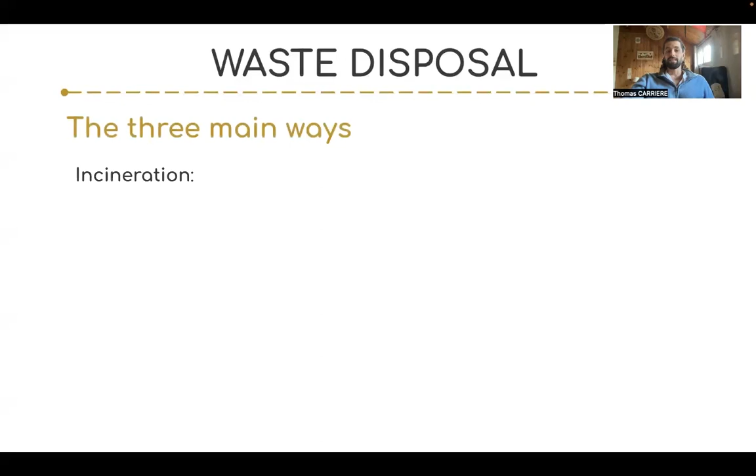Plastic recycling, technologies, and solutions. So first of all, let's talk about the different main ways for plastic waste disposal. There's three main categories and many other small projects, but let's talk about the three main ones. First of all, you have incineration, which means that we're going to burn the plastic waste to get energy. It's quite developed in Europe, in the developed countries, and also in the third world. So burning the waste to get some energy, even though it pollutes, is still better than putting it in nature and giving it hundreds of years to degrade naturally.

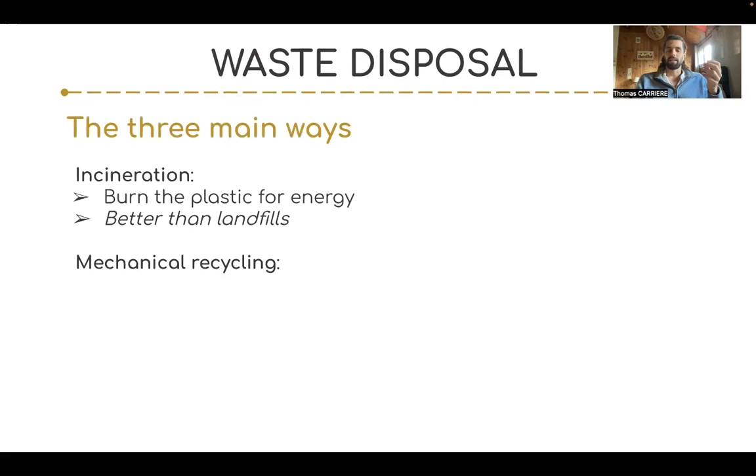So it's not great. It's not really a recycling technique, but it's a very well implemented technology all around the world. So at least it doesn't rot in nature. At least we get something out of it, some energy, some electricity. Better than incineration, we have what is called mechanical recycling. So this is about reducing the plastic waste into small pieces, what we call plastic pellets. You might have seen that in some documentaries or on the news. When they show that they are doing plastic recycling, you saw all these little beads that also sometimes end up in nature. So that's much better than burning it because it doesn't cause all this pollution. We can reuse it for something else.

Now we need to understand that when we're doing mechanical recycling, you need to put new plastic with these plastic pellets in order to use it again. Because when you're shredding this plastic in little pieces, you still have the chemicals and the paints and the coloring and the stickers that were on it and so on. So it's not good quality plastic. So to make bricks, for example, that we're going to use in construction for roads and buildings, you take these plastic pellets, which come from recycling, and then you put new plastic also. Bit better than burning. Now, today, in our day and age, we can do better. And that's what we're going to talk about today.

It's called advanced recycling. And the goal is to decompose chemically the plastic into its constituents. And you know, plastic comes from petrol. It comes from crude oil. It's actually possible, and we're going to discover that today, how you can extract from the plastic the original material, as close as possible, and then you can make new plastic with it. That's much better because you can have a high quality of plastic. So you have several technologies for that. Pyrolysis is the main one we're going to discuss today. You have catalysis, solvolysis, you have enzymes, you have work with bacteria. But here we're focused on solutions that have a chance of making a difference on the larger scale in the world.

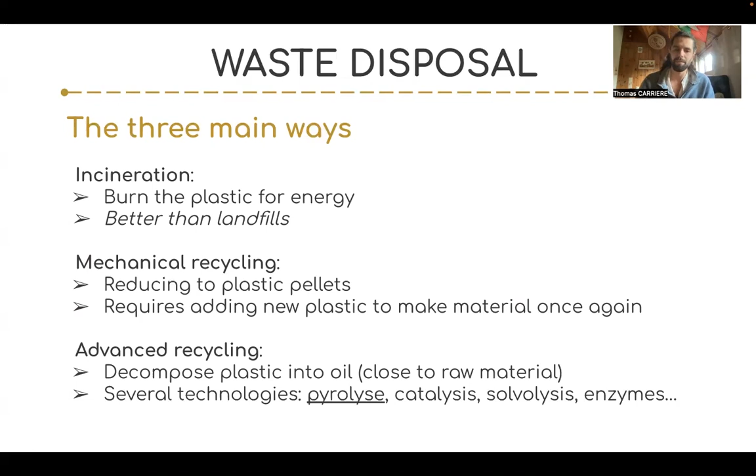Let's look at what's happening in France, for example, because I'm from France and it's a developed country. So we are told when you put the plastic into this yellow bin, it's going to be recycled, no problem. That's what we are led to believe. But the truth is, in France today, 25% of the plastic waste is going to be burned, so incineration, 15% only is actually recycled, mostly with mechanical recycling. And 60%, which is most of the trash, actually ends up in landfills. And that's shocking, because we were told that when we put it into this plastic bin, it's going to be recycled. But it's not true.

Like we saw last time, until 2016, we were actually shipping all this plastic waste to Asia. And today we cannot ship it to Asia anymore. So we put it in landfills and we try to develop the recycling. It's probably a similar situation in America and in the other modern countries. We are told we recycle, but truly we recycle less than 20%.

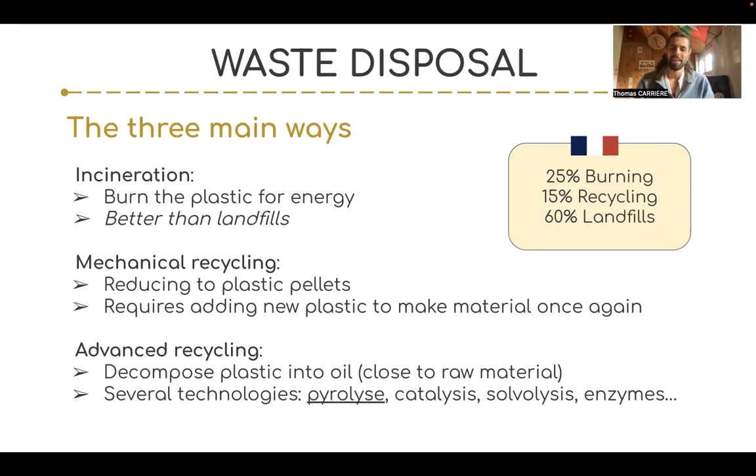Great. So today we talk about advanced recycling. Why is it really a big opportunity? Let's look at what McKinsey is saying. McKinsey is a global strategy and consulting firm where actually many of my friends from school have been working. And they made this study in 2023. So this is from this year.

McKinsey, they advise the CEOs of all the top companies, and their business is enormous. So they're really the reference, with the Boston Consulting Group, for the global strategy and what's happening on the market. And McKinsey, they're saying that actually the advanced recycling opportunity is going to grow to require more than $40 billion by 2030 and $90 billion by 2040.

So you can see here on the little analysis. In black, it's the plastic that's coming from petrol. In light blue is the advanced recycling, and in navy blue is the mechanical recycling. So you can see the mechanical recycling is projected to become bigger and bigger, from 7% to almost 20%. And the advanced recycling, which is the one that CORSAIR is doing, is almost inexistent in 2020, and is going to grow to 6 to 10% of the market.

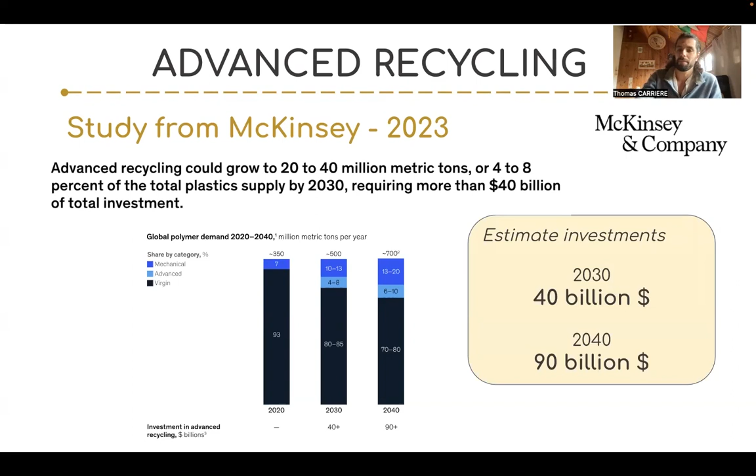And then there is a study from Google from last year. And Google is showing this in the report. I can send you the link. It's a very long report on everything that's happening around plastic. In 2019, the size of the market, of the current capacity for this recycling, is 1 square. And you can see for mechanical recycling, which is the one that just cuts into little pieces and then you need new plastic, is going to multiply by 4 by 2030 and then by 6 by 2040. A market that multiplies by 6 is already great.

Now look at the chemical recycling. They are predicting that by 2040, this market, due to the capacity that is required, the market needs, is going to multiply by 135 times. Do you see that? So Google and McKinsey analyze and tell us there's an enormous market for chemical recycling, meaning re-decomposing the plastic into an oil that then we can make new plastic with.

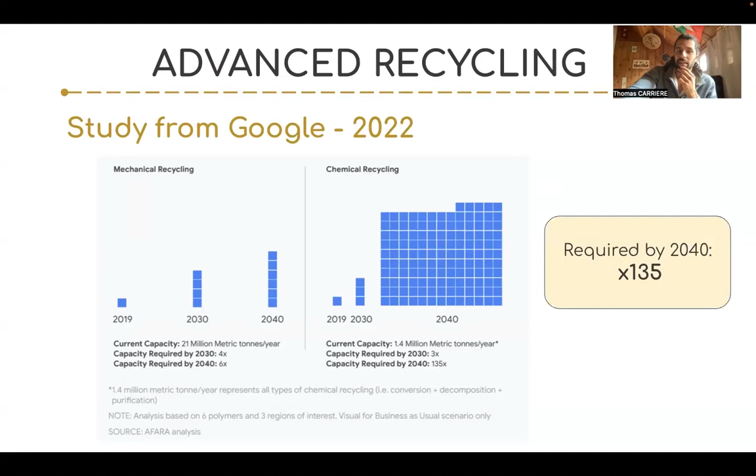So that's what we're going to talk about today, because CORSAIR started in 2020 and is going to ride this huge wave. And we want to ride this wave with them. So that's amazing, and that's very big. Let's talk now more pragmatic. What is this advanced recycling called pyrolysis?

The simplified process, I took it from a video on YouTube, it's this. You heat not too high, around 400 degrees. You put the plastic into a container. You take out the oxygen and you just heat it. You play with the pressure and the temperature, and you have two main products. The first one is gas that comes out of the plastic. And the second one is this pyrolysis oil, resembling gasoline. And that's what we're looking for. We're going to see real pictures after.

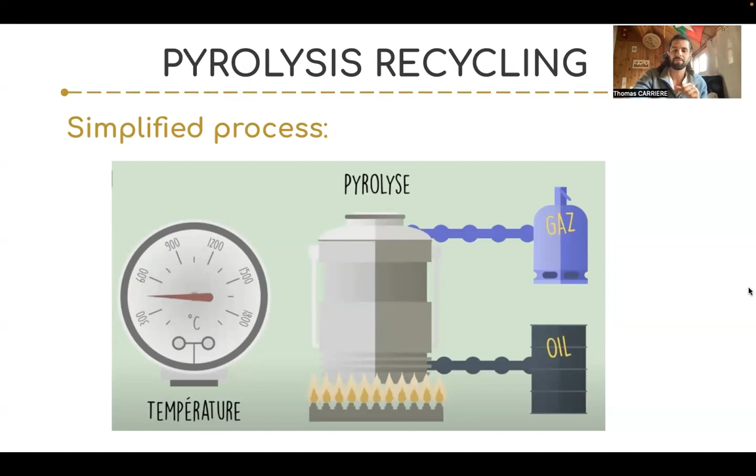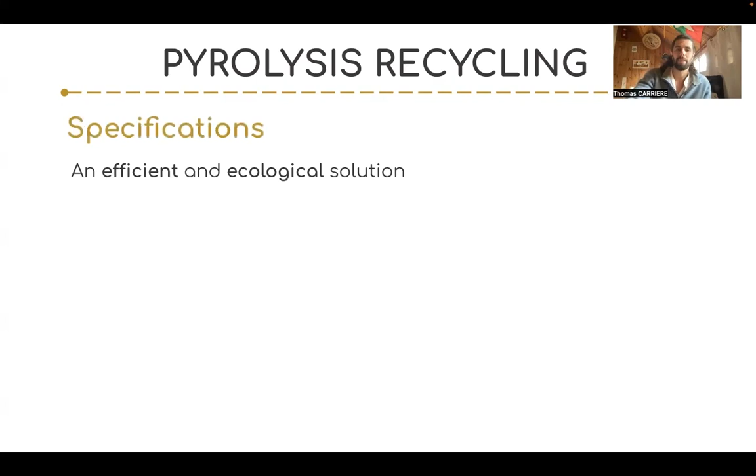So basically, it's a cooking pot in which we put the plastic, we take out the oxygen, we heat it, but we don't burn, and it's going to re-decompose, it's going to melt into gas and oil. Makes sense because it comes from petrol. So we're going to dive a bit deeper. This particular technology, the pyrolysis, is very efficient and very ecological. That's why we're so interested in it. So let's talk about the efficiency so we really have an idea.

Today, the technology on the market can convert all the plastic waste into pyrolysis oil up to 75%. And CORSAIR developed the knowledge by working with all the industrial and university experts up to 90%, and they proved it. So it means that their capacity, when you take a big pile of plastic, is that they can transform that up to 90% into what we want, the pyrolysis oil. So that's very efficient. There is little loss there.

And the most important is that when you make new plastic with this oil, it's going to have the same quality as if you made it with new petrol. And this is major because with the mechanical recycling, when you cut in little pieces and then you put new plastic, it's bad quality. You cannot make containers for food or for the pharmaceutical industry because there are all these chemicals and these paints and this waste inside.

Here is much more interesting because it's literally saying that you can take the plastic waste and make new plastic, same quality as if you did it with petrol. So of course we should use it because remember what we saw last time, there's 10 billion tons of plastic laying around in nature. And we could take from this plastic and make the same quality, also for the pharmaceutical industry and for the food industry. So it's very efficient.

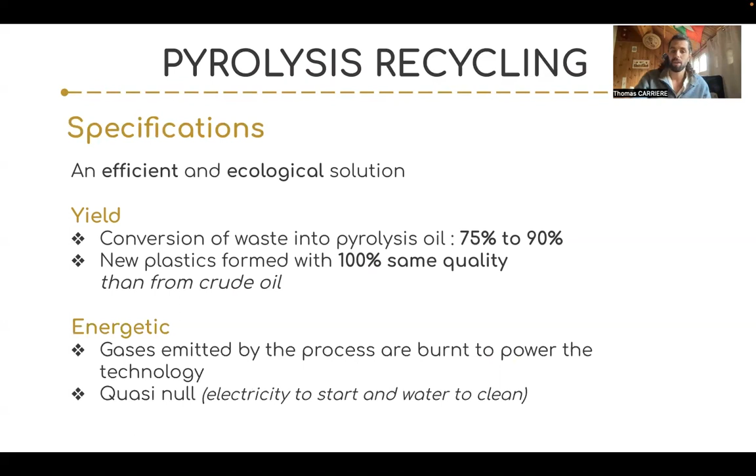Now let's talk about the energy balance. What does it require? What's the most interesting with this technology is that the gas that is emitted by the process is going to be then burned to heat the machine. So it's self-sustaining. And that's very powerful because the actual recycling plant doesn't require so much energy. It's very ecological. All you need is electricity to push the plastic into the machine with a hydraulic press.

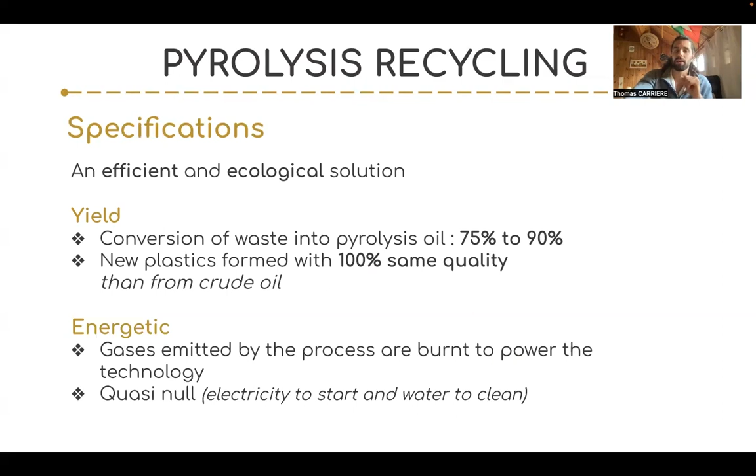So here you need to push with the electricity to make the engine run. And then you need water, a water source to clean the gas and make sure the whole process doesn't pollute. So that's why it's very efficient and very ecological at the same time. And that's why we're so excited about it. All right. So you can make new plastic, same quality as if you took new petrol, and it almost doesn't require any energy. Super powerful.

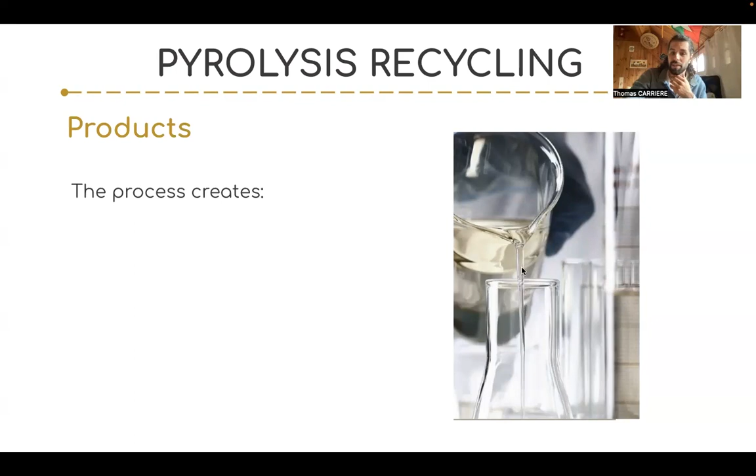Now let's look at what's coming out of this process. First of all, you're going to have the actual pyrolysis oil. We're going to call it plastic oil. That's what we're looking for. It looks like this when it's very high quality. It's very transparent. This pyrolysis oil is what's going to be used to make new plastic later. Then you have gas. But these gases, we said, we're going to put them in a pipe and then burn them under the oven. So they are used in the process to make the machine run.

And finally, you have some black residue. It's actually charcoal. And it's coming from all the paints and the coloring and the chemicals that were inside the plastic. They're going to pile up at the end of the process. And it's like a very dark charcoal material. And the good news is that we can also do something with this black material. We actually sell it to companies that are coloring car tires.

And that's what I really love about this process, is that they found a way to valorize all the byproducts of the process. So you have a lot of plastic waste that no one wants, no one knows what to do with it, and it's really polluting the planet and our own bodies. And here you're going to extract everything from it. You're going to give jobs to people to clean it and operate the machine. You're going to get this pyrolysis oil to make new plastic and make the economy circular.

You're going to have gas that you clean and then you burn to make the machine run. And then even the black stuff that we could say is the pollution, actually you can use it as a colorant for car tires, for example. This gets me very excited because it's a very smart process to do something useful and also lucrative with all the plastic waste we're having.

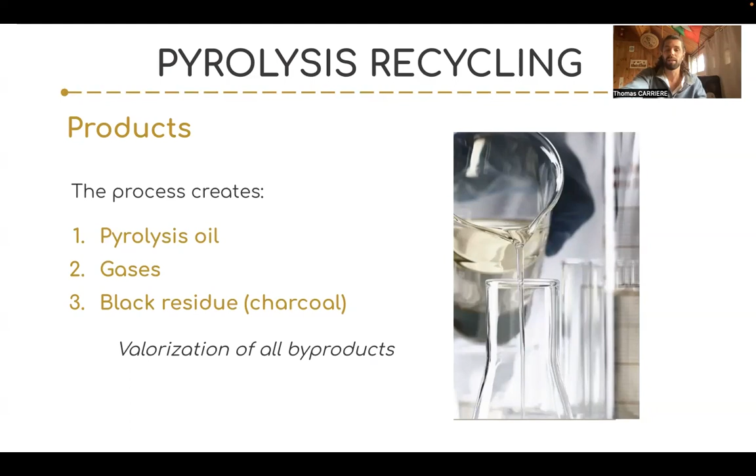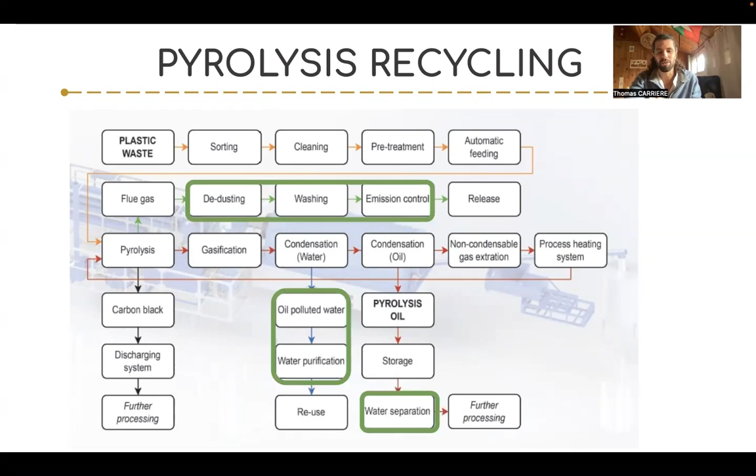It's going to make this carbon black material. And then you're going to clean everything that is coming out of the machine. You clean the gas, you clean the pyrolysis oil, and you make sure it doesn't pollute the environment. So everything you see here in green is modules that are here to clean everything around the process. I'm going to show you in images right after. But what's crazy is that there are as many machines to clean all the gas and the products as machines to actually recycle.

So there is this ISCC that is very important. It's the International Sustainability and Carbon Certification. It's the body that is checking everything regarding pollution, carbon credits, and now it's going to look at plastic. This institute has a certification that is quite hard to get. For example, in Thailand, there are only 2 companies that have it, including CORSAIR. So we could be like, okay, great, we're going to talk about a certification, but actually it's quite important. Why? I'm going to show you.

First of all, it guarantees very low pollution levels, because to have this certification, experts are coming to check your machine and to study the byproducts, and they check that you're not polluting the environment because you're not washing the gas or because you're letting it leak in the waters. So if you have the certification, it's that you could prove to these experts that you have a very clean process.

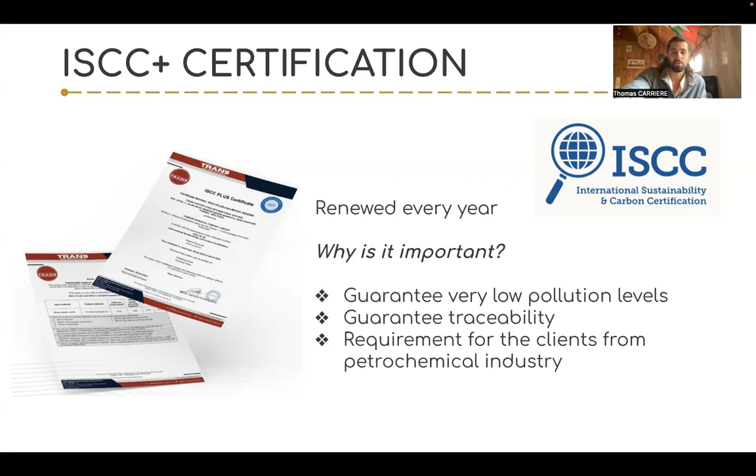Second, it guarantees the traceability. How you account for every kilo of plastic that is going in the machine, and how many liters of oil and gas and the charcoal. So the goal is to make sure that nothing goes missing and is buried somewhere in nature. And lastly, it's quite important, our clients, the ones that are buying this recycled material from the petrochemical industry, require to buy this plastic oil only from people who have this certification. Again, to make sure no one is creating the product and polluting further.

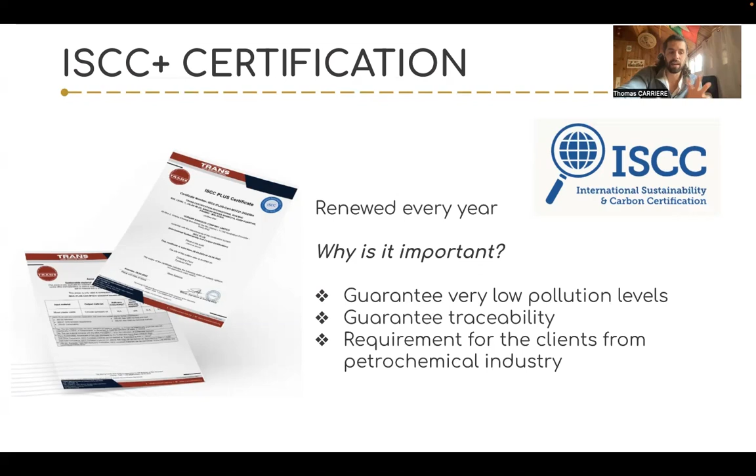So CORSAIR, this company, has this certification. It's hard to get, it's rare. And it's very important because it guarantees to our client and to the world that we have a really clean process. Okay, so just a word about the certification to guarantee that this whole chemical recycling plant is not polluting the environment further.

Now, what's very interesting about this particular product of CORSAIR is that it's extremely high quality on the market. You can find on YouTube some videos of people doing the process in their garage with big tanks, and they're burning the plastic to make oil and put it in their scooter. But actually, that's going to pollute a lot. It's hard to make a very high quality oil that is transparent, like you saw before. And CORSAIR is very proud of their product because they worked for 18 months in order to get it to that level.

The first time they had their plant, they made their machine, they brought it to the petrochemical industries, and they looked and they said, sorry, it's not good enough quality. We cannot make new plastic with this. And they had to work for 1.5 years with all the experts of Thailand, and probably also some international, to tune the machine and the process and make sure they have the highest quality of oil, which is amazing because then you can sell it for more money and make more clean plastic.

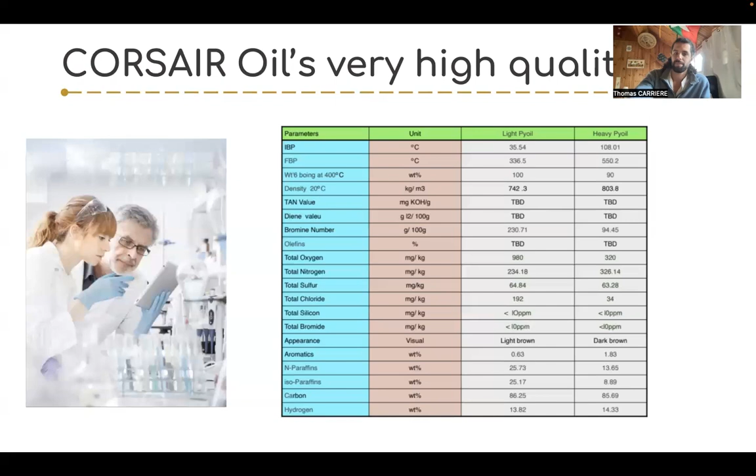Now let's talk about the carbon emission, because we can think, oh, these big plants, they're releasing so much carbon in the atmosphere because they're burning the gas and using electricity. This study that I'm going to give you access to as well discovered that when you compare the pyrolysis, what we're talking about, and the incineration, which is this other process where you burn the waste for energy, pyrolysis is actually emitting half as much CO2 as incineration.

So this particular technology that CORSAIR is bringing to the market is saving carbon emissions compared to what is already used everywhere around Europe and America, these burning plants. So on top of being very good for the quality of the plastic, it's also better for the emissions in the atmosphere.

So really, the more you dig in this pyrolysis world, the more your mind is blown. Because how come we didn't do this before? And I remind you why. It's because it was not mandatory. It was never mandatory to do the recycling, so big companies just continued to take new petrol and make new plastic and not care where it's going to go. Thankfully, this is about to change.

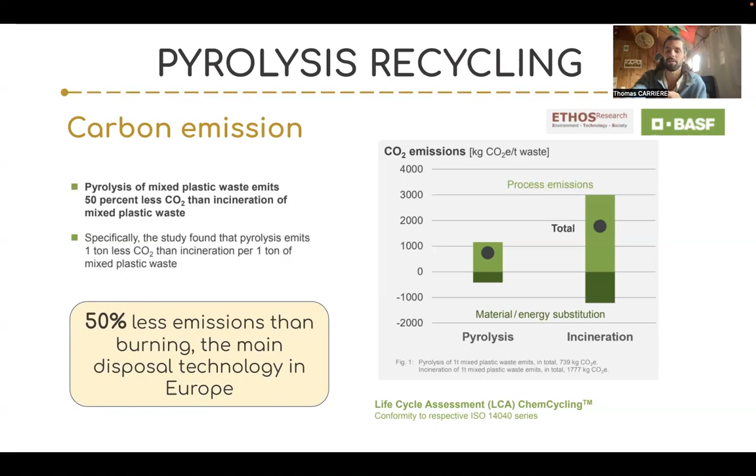So today we really looked at some specific reasons why pyrolysis is the future around making the plastic industry a circular economy, like paper, like glass, and like metal. So that's it for the hard contents. Now let's look at some images.

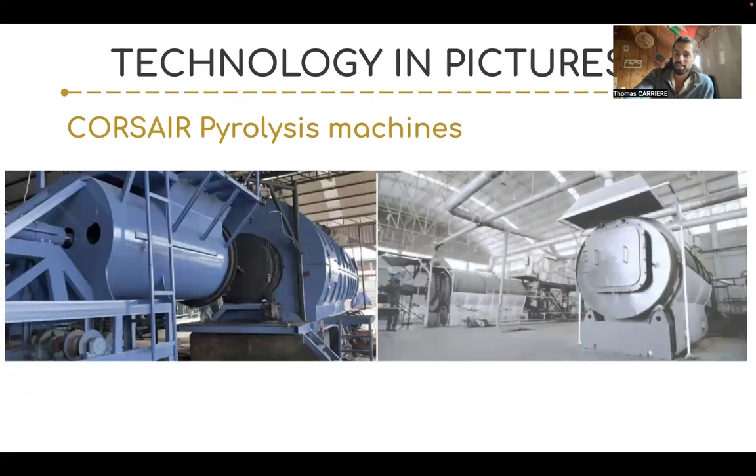These are the machines that CORSAIR has and that I visited myself in Thailand, in the center in Bangkok. So you have some blue machines, you have some gray machines, you have newer models that are green, but just so you know, they're coming from China and from Korea. They're the manufacturers of these machines. Then, of course, you need to install it and to operate it.

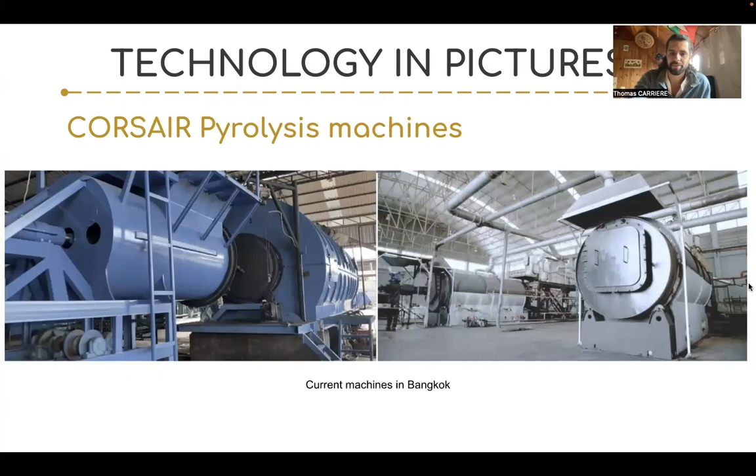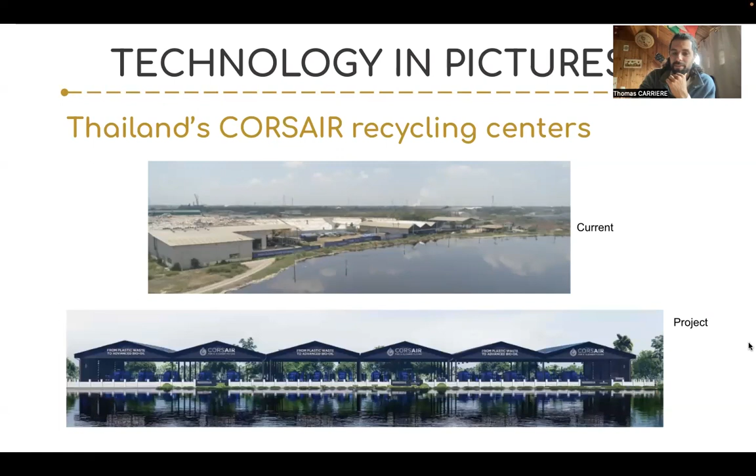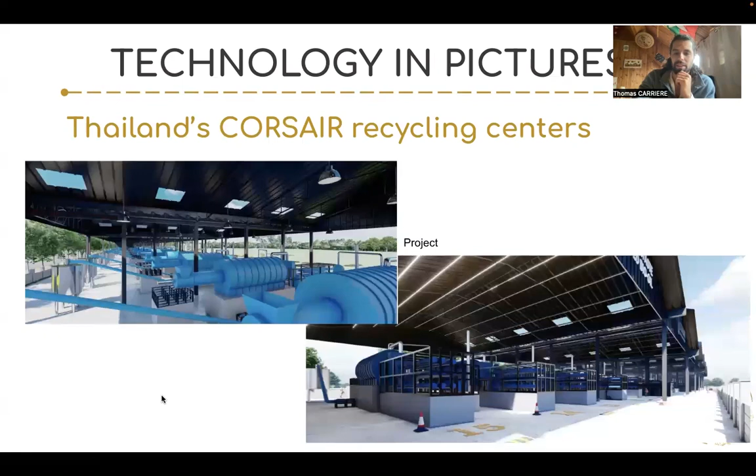And the project that they're having is to make it even nicer, but most importantly, to put many more machines. So if we look at all the pictures of this project, it's going to look like that. A lot of these machines, perfectly aligned and piled up so that it's efficient to run. So in a few years, when we go visit their centers, we get to compare the pictures with this plan.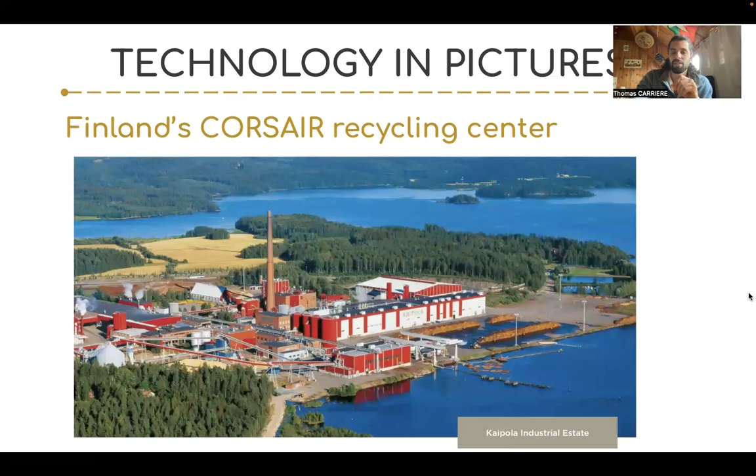And I told you before, and if you don't remember now, you have the information again. They opened in Finland, in a wonderful place in the middle of a lake. It used to be a paper factory that relocated to the south of America. They took over 6 hectares, this entire L-shaped building there. And they started to move in and install the first machine since this summer. So today, they have been installing the first reactor.

So here you see another color. And I just wanted to show you this. This set of machines is the same size as the whole reactor. And this entire set of machines here is just to clean the gas and to ensure that the process is clean and doesn't pollute the water or the air. Remember, I was telling you before, there's actually almost more machines to clean around the reactor than the reactor itself. So that you can see in pictures.

And like I said in the introduction, they are starting the tests at the moment when I'm recording this training.

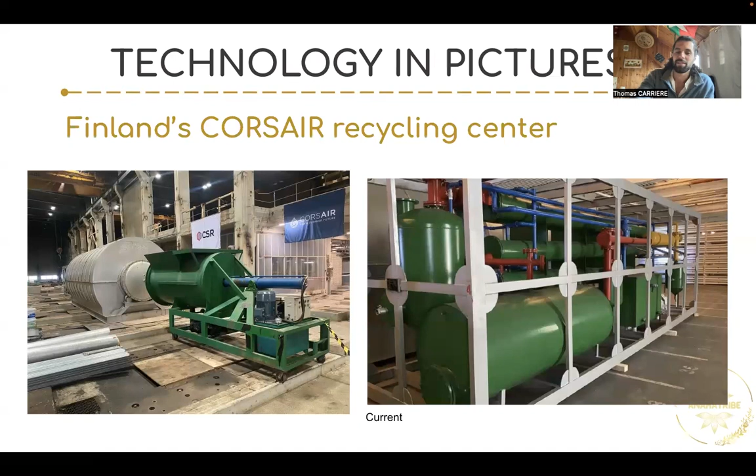Great. Let's conclude by looking at the vision of this company, because the proposition is that we join forces with this company and we allow ourselves to ride this business carried by the regulations, make money in that process in a conscious way, and clean out plastic from the environment. So we need to know, where is this partner going?

Their objective at 2030 is to be able to remove 2 billion kilograms of plastic from the environment every year. That's what they want to do. And they want to be able to produce at least 1 billion liters of plastic oil. That means they're not recycling everything themselves. Remember, we were saying it's around 80 to 90% of efficiency.

The reason why they can remove more plastic from the environment than oil is because they're going to bring contributors into the program who are other companies doing recycling. Maybe not chemical recycling, but any company who is recycling plastic today can join in a contributor program and be part of this vision. Their goal is to reach 1 billion euros of sales of this plastic oil and their activities in 7 years.

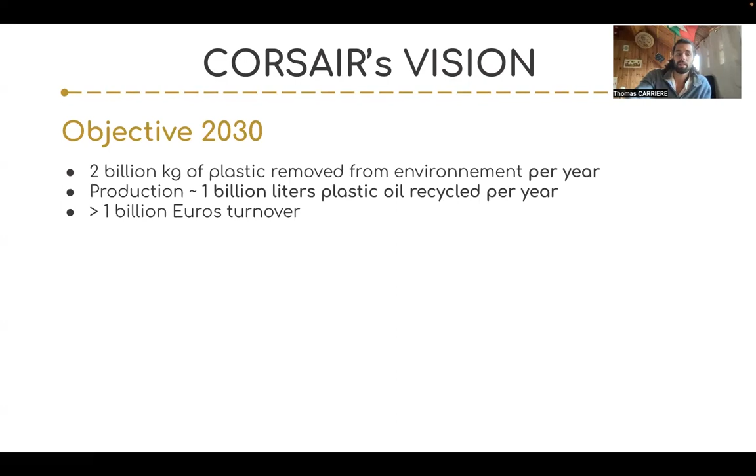And they want to open 144 locations in the world and 81 countries. So today, where are we in this vision? First of all, we said there's already 3 machines running in Thailand. That's where they started their proof of concept since the beginning of COVID in 2020.

Today, they are opening in Finland. Last summer, they opened in Finland a huge center, which will have 50 machines. Then they started to announce a partnership in Sardinia, in Italy. And now they just announced opening a center in the Netherlands and in Laos. So in just a few years, it's going to be already 7 centers on this 144.

And of course, the bigger you grow, the faster it is to install these centers. It's quite an easy business because you just need a roof, water, electricity, and some staff. You don't need a fancy building because it's industrial employees that go there, and it's quite cheap actually to implement. So today, more and more people are trying to get this company to come to their countries. And I think today the CEO is flying to Canada to go and open the activities in Canada.

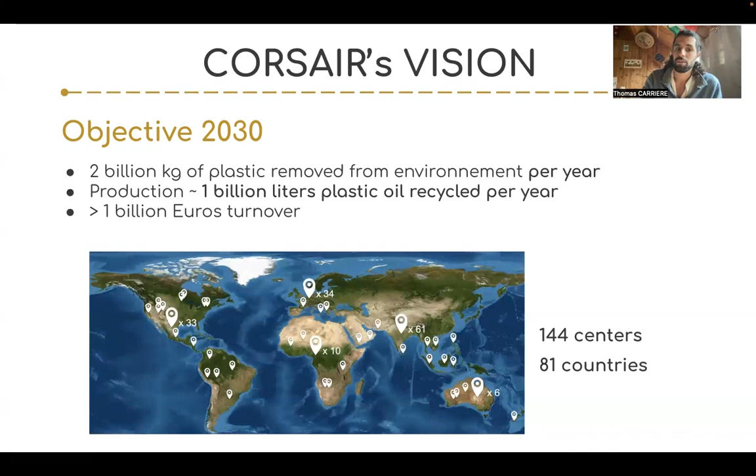So 2 billion kilograms of plastic removed from the environment every year. It's huge. Today, I remind you what we saw in the first class. It was 500 million tons of plastic that we need every year.

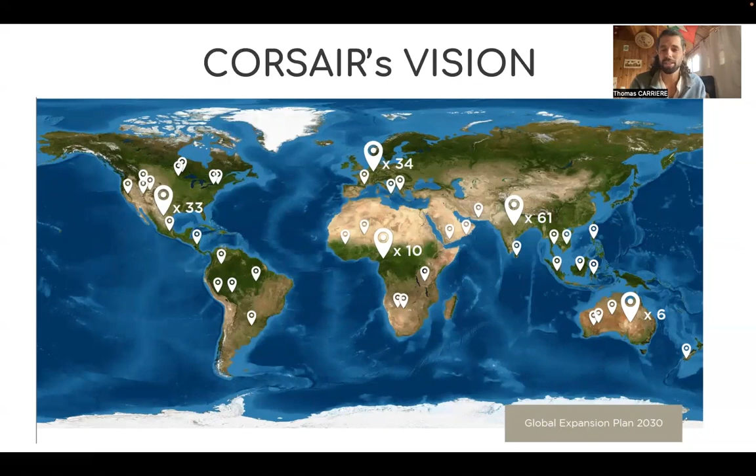And now, to conclude today, I want to tell you something incredible that the CEO has told me. Even if CORSAIR reaches this vision of having 144 centers with so many machines running all the time, taking out so much plastic from the environment, there is still room for 100 other companies the same size as CORSAIR. Even if CORSAIR achieves 2 billion kilograms removed from the environment every year, 144 centers all around the world, there's still enough plastic waste for another 100 companies of the same size.

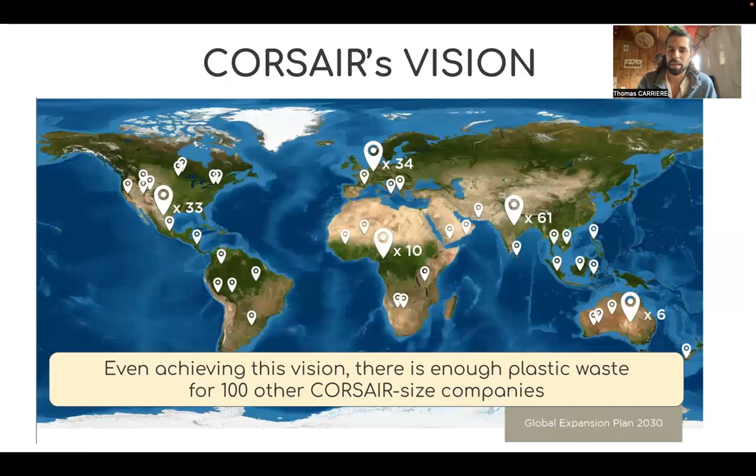And that's truly mind-blowing, because you realize first how big the market is, and that it is not so competitive. You know, it's already shifting to a new paradigm here. And we're really happy about that because we can easily work towards a great new vision, and it's not going to be so painful and difficult and competition-based like what's happening today in the world in all the other industries.

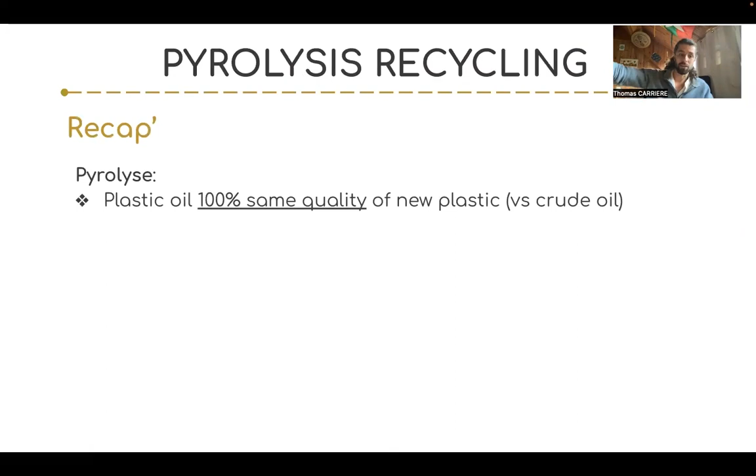Okay, let's do the recap. We talked about pyrolysis. The most important thing you need to remember is that you can make plastics of the same quality as if you took new petrol. That's the most important. Because then it means you can take out all this plastic that is in the environment and you can stop taking new petrol. Number one.

Number two, it is very ecological because it makes its own energy that it needs to run, and it's clean based on the certifications of the ISCC. And that's all I want you to remember about pyrolysis. Same quality as new petrol and very ecological.

And then we talked a bit about this company, our partner, CORSAIR. What they want to do, if you remember in one sentence, they want to bring this pyrolysis technology to a large scale. Not a small company that has one machine over there and one conscious community in this village that has one machine. They want to bring this technology to a big scale, an industrial scale. In order to do what? To create a lot of this plastic oil to meet the big market needs.

You remember we said in the first class that 30% of the new plastics by 2030 need to be made from recycled material. A third of the material for the new plastic needs to come from this plastic oil. So the market is enormous. And that's why McKinsey and Google are saying this is an enormous market. So it's a great opportunity not to be missed.

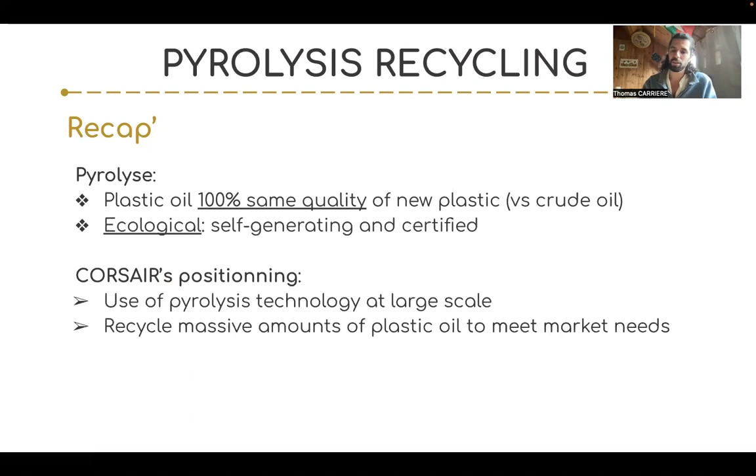The goal of this class was to understand that pyrolysis, this technology, is actually the best solution to make a circular economy, because it's good for the environment and it's really making the same quality of plastic. So it can meet our needs based on our waste and not new petrol.